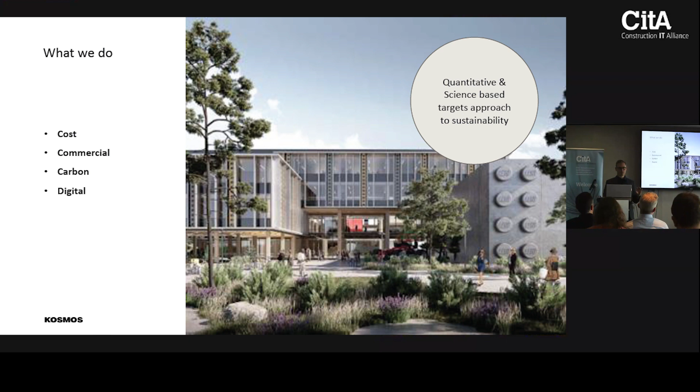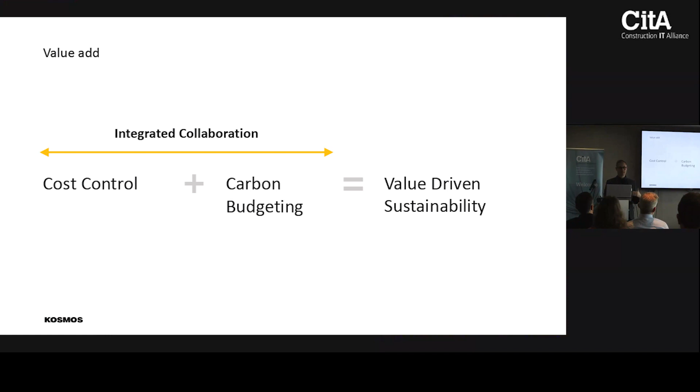And to us, carbon and cost are intrinsically linked. You can't impact one without impacting the other. So to add value to sustainability, we would set a cost budget, set a carbon budget, and use that to achieve those targets through collaboration. So the first thing is looking at carbon literacy, understanding the impact of carbon in buildings. And then how do we actually count that?

How do we put a target on it? How do we set figures for what good looks like and what better looks like? And then what's important is, at the moment, if somebody sets a target for sustainability, it's really dependent on what country they're based in, what standard they're using, and I suppose what the organization's ambitions are.

So we're trying to standardize that and say, no matter what country you're in, no matter what type of building you build, you can set a target for your projects or for your pipeline. And then I think what's important is that we don't do this in a silo. We look at best case examples from London or from Denmark or from the US and see what works there.

So I suppose what's driving all this? What's driving this, the increasing emphasis on not just sustainability, but on decarbonisation? And I suppose at the moment, we have a large kind of deficit in housing that we're trying to meet. And at the same time, we know that construction is quite dirty. It's responsible for about 36% of global emissions, and about 11% of that is just down to the supply chain, to the materials we use.

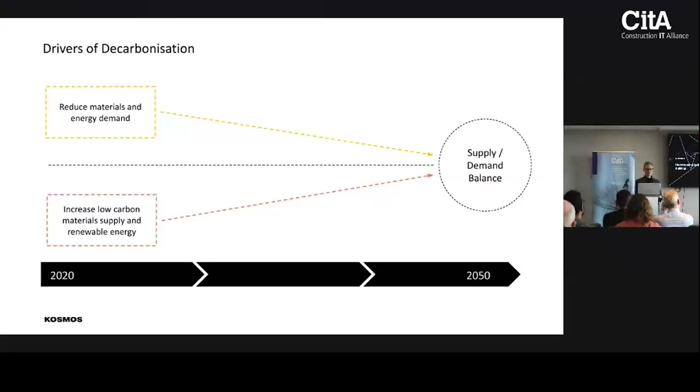So we need to have a more intuitive understanding of the impact of carbon and where the carbon kind of hides out within our construction projects and our retrofit projects. So the way we do this is through whole building life cycle assessment. So that's that life cycle word again, we're taking a whole of life approach to design, procurement, management, maintenance, operations, and disassembly. It becomes the whole life of that project.

And so we carry out an assessment, and that assessment looks at those impacts from the construction process, from the management of the building process that affect the environment, that add carbon to the environment. So we break that down to the individual products and the processes from that. And then we try and measure that against climate impacts like carbon, like methane, like water use.

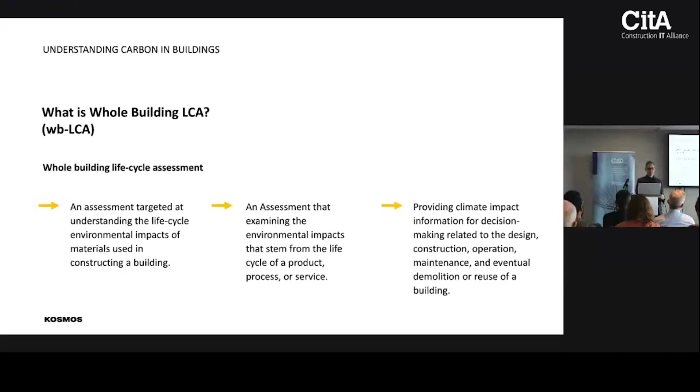So why is it important? Buildings are a big part of our overall global carbon footprint. And we need to know where to target our energies. Should we target it in transport? Should we target it in energy? But buildings, because they're responsible for so much of our climate impact, they're kind of an easy target. So it's easy to set policies to target real estate and construction.

And so we use life cycle assessment calculation to tell us where we are right now with our projects and where we're going, and to set decarbonisation targets that become more stringent every year towards 2040 and 2050.

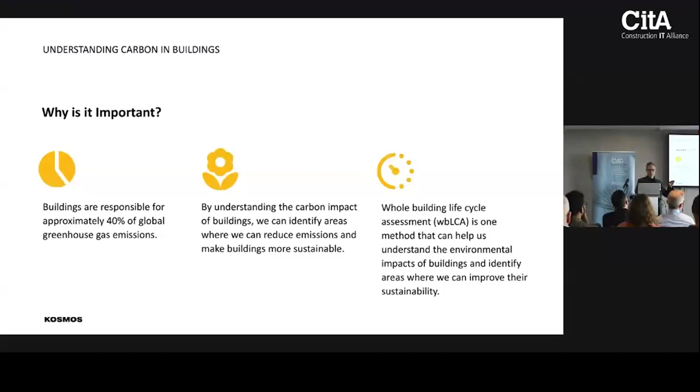So how do we define this life cycle approach to carbon? And what we say is, look, we have some of the carbon that's related to the use of a building, and that's kind of the 50% there that's black. The use of the building being running the chillers and heating hot water, etc., running the fans. But we also have to consider the embodied carbon. So the upfront embodied carbon, which is the carbon that's in the structure and the materials, and then the downstream, which is in the maintenance and replacement.

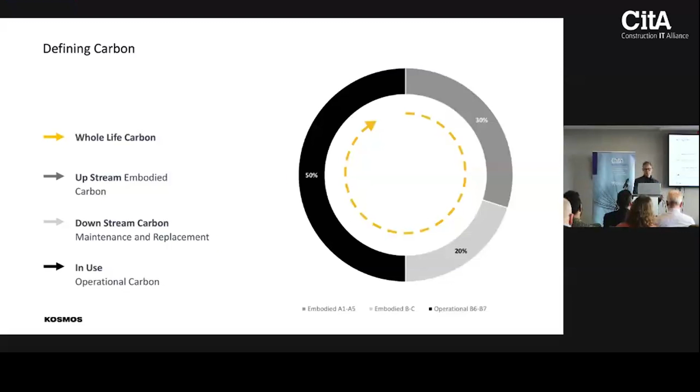And I suppose historically, operational carbon was kind of 70–80% of the equation. But because our buildings are now designed to NZEB, or nearly zero energy buildings, that equation has tilted. And as we go towards zero emissions buildings, the operational energy will become much smaller. As the grid decarbonizes, the carbon in that operational energy will become smaller, and the embodied carbon will become a bigger part of the whole story. So it's becoming a higher and higher priority on the agenda of sustainability.

But it also is an important indicator for a lot of the new disclosure regulations that are coming in. So organizations have started to disclose under the EU taxonomy and under the SFDR for their green funding. But next year, other organizations are going to have to start reporting under the CSRD. And part of the CSRD is you have to plot your pathway against Paris 1.5 degree decarbonization targets.

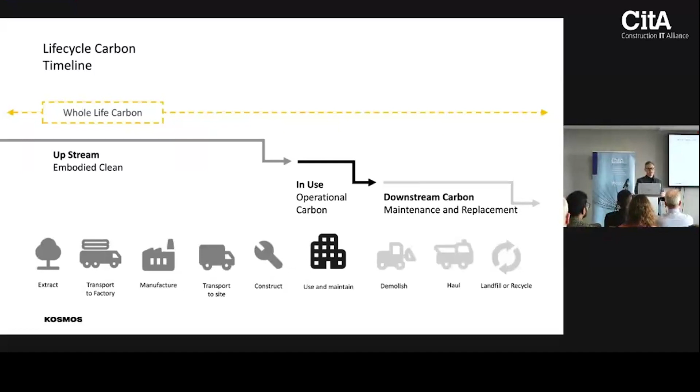So your operational carbon, and if you're an investment company investing in real estate, you have to show your carbon targets, your carbon footprint for each year against those rapidly declining carbon ceilings. So we break down the building into its different components and the different stages of the life cycle, looking right up the supply chain to the raw materials. Where does the steel come from? Is it electric arc furnace from Port Talbot, or is it coal-fired from Turkey? We look at the construction, operations, etc.

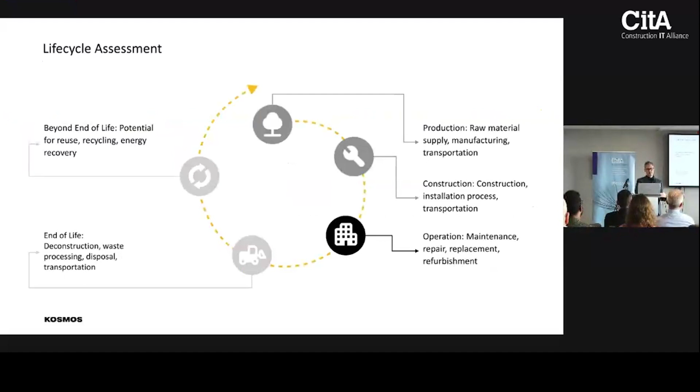So we need a lot of data to understand where the material is being produced. We need its environmental product data sheets, and we need the quantum for that. And we have a number of boxes to fill, and these boxes would be the upstream products, the use of the building and the replacement and refurbishment, the deconstruction of that building at the end of life. And then we can also start to look at, do the materials have a life beyond the building? So that'd be looking at things like mass timber, looking at steel, what happens afterwards with that.

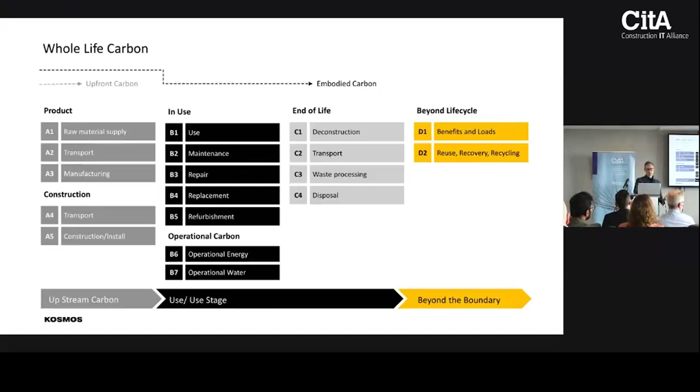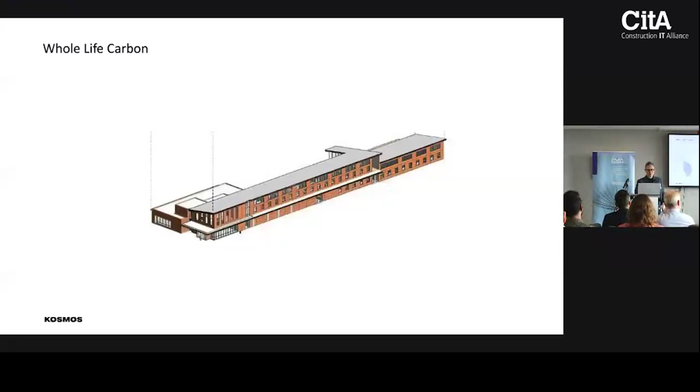But like anything with data, there's challenges within that. So when we look at a building, say a school, predominantly the structure and the walls of that are going to take up a large volume. The facade, like the brick cladding, is another part of the volume. And I think it was Buckminster Fuller who said, "How heavy is your building, Mr. Foster?" And generally we can equate heavy materials with carbon intensive materials. So we can see that the majority of the carbon impact in this building is in the heavy components of structure, cladding, roofing. And so we can focus on those.

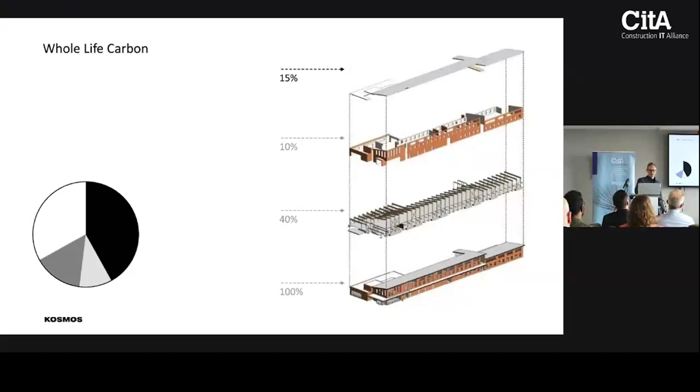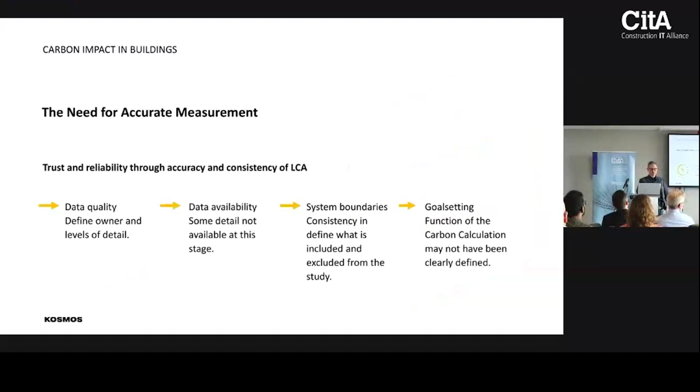The Pareto rule is that 80% of the work is in 20% of the materials for us. That's not exactly Pareto, but yeah. So accuracy is important in carbon because it's a bit of a wild west at the moment. Two assessors could do a carbon assessment and come up with completely different results because they're defining it separately. They're using different boundaries, different methodologies. So consistency and accuracy is the order of the day at the moment.

So we're trying to make sure that everyone is using the same calculation, and the Irish Green Building Council are working at that, but also consistency, that if we measure one building against another, they can be compared. And in terms of standardization then, in that data, we've been through this process with BIM before, but BIM is quite useful to streamline the process of taking off quantities. So for instance, if you're taking off quantities for cost, it's the same volumetrics that you're going to use for carbon. So instead of measuring twice, you just need to measure once.

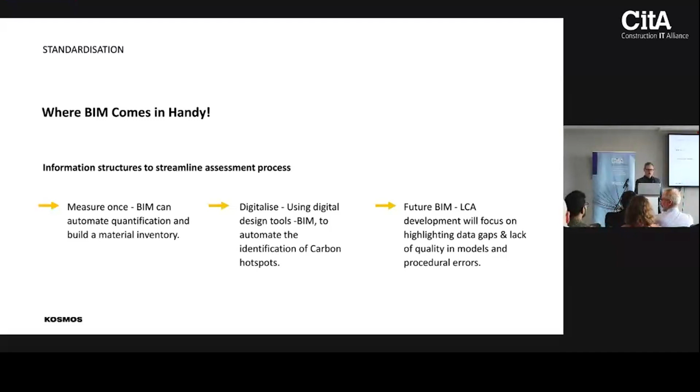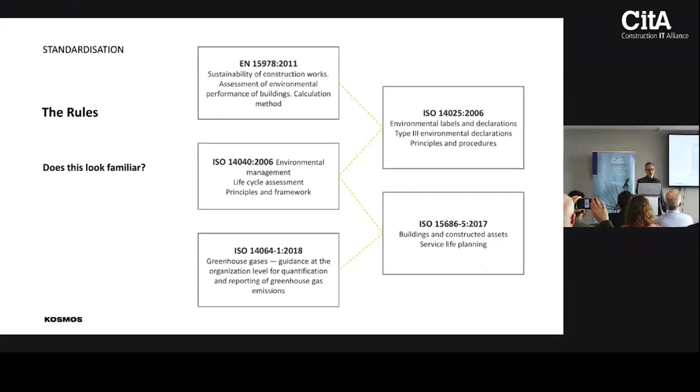In terms of identifying hotspots, having a model where you can segregate it by materials is quite useful. And BIM will have more of an impact. I'm looking forward to seeing Simon's presentation on this later. So in terms of standards, there's a number of standards for LCA. So in a way, it's similar to the journey we had with BIM. And using the BIM models, we can start to take off more accurate quantities, but we can also track the building. So if something changes, then the volumes change, the budget changes, the carbon changes. So we can track it at each gateway.

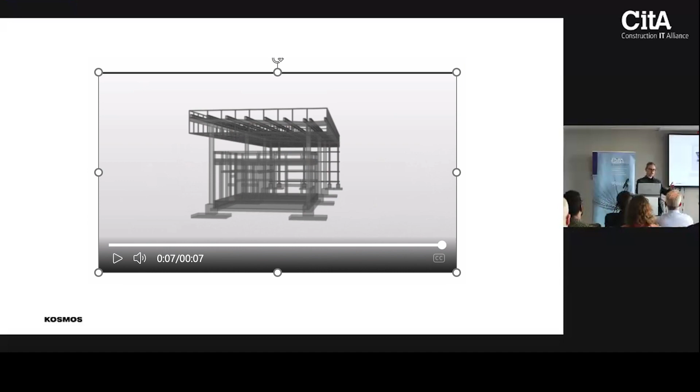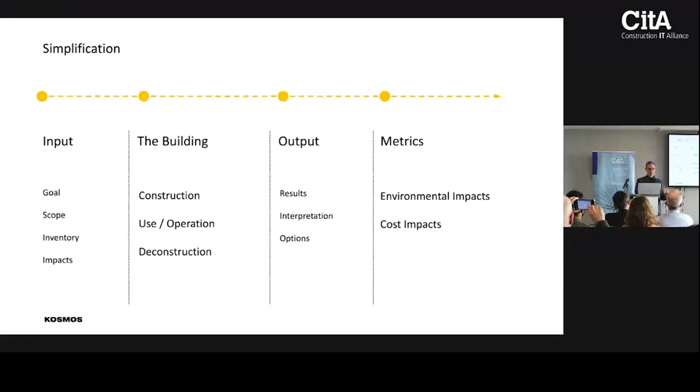But what we've learned from international practice, over 8 years in Denmark, is that you need to have a standardized process that everyone in the design team, everyone on the client team can fit in with. The outputs are only as good as the inputs. But what's important to us is that the metrics that we have are the climate impacts, the cost impacts, but also the data quality scoring is important. So in Denmark, they have an 8-year head start.

We're trying to do this in 3 or 4 years. In Denmark, they've done this in 8 years. But looking at Denmark, it will help us short circuit that. So they wrote life cycle assessment into their building regulations as a voluntary guideline back in 2014, and they built an assessment tool, and then they published it in the regulations and started to test out what good might look like and look for data.

And they looked for 80 buildings first of all, and they then looked at 200 buildings to say, what should the mandatory standards be? And in January this year, the mandatory standards came in. And now the designers are coming back saying they're not ambitious enough. They really don't meet our national targets.

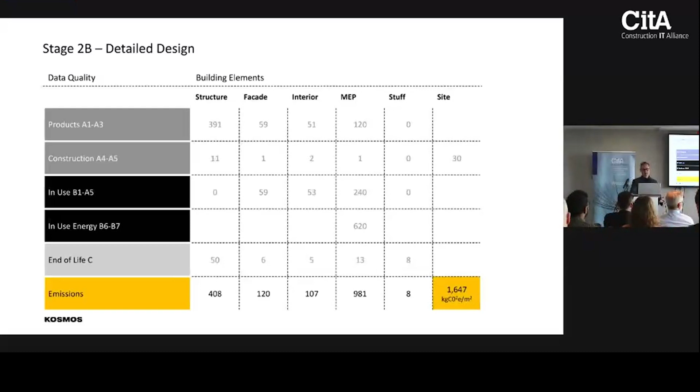So essentially, what we focus on is data quality to be able to say, well, how representative is your carbon model of the construction stage building? And we would say, well, in terms of structure, your structure is fairly comprehensive, fairly representative. But as you score the data going down towards interior finishes, MEP, external landscape, external civils, you have lower figures. And so your representativity score can be quite low. So to go for tender without having the full picture can be a risk.

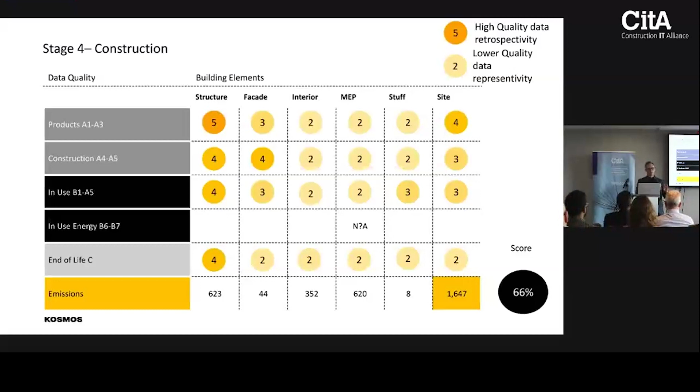And what we would do then is, just like in cost, we would add a contingency and say, you need to add a contingency there, because if you are writing performance criteria into your contract, then you want to make sure that the main contractor can actually achieve those targets. So I suppose where we come in on public projects especially is to look at where the data gaps are, where there is uncertainty, and try and either plug those or make sure that there's sufficient budget in place for that. And so there's a kind of a process to do that.

And we would say, look, at a very early stage, do some baselining, and then work with the organization or the funders for your goal setting and your data collection strategy. And then start to look at, well, what changes if I apply a life cycle lens? Do I look at materials that have longer service life? Do I look at air conditioning units that use a different type of HCFC gas? And how do I make sure that I have a maintenance strategy? Do I asset tag with GS1 and SFG20 systems, etc.?

How does carbon overlap with the sustainability objectives of BREEAM and LEED and DGNB and Levels and all those other good things? And then let's plot this out and look at our net zero roadmap. So we know that the carbon ceiling is reducing all the time as we get towards 2050. Can our building track that? So have we a building that's, say, fully electrified? It can piggyback off the grid. As systems come up for replacement or renewal, they can become more efficient.

And the tenants that operate the building can also have a relationship with the landlord that facilitates achieving zero carbon ambitions. Data quality I've spoken about, and that's really where the BIM part of it comes in, that you need to be able to evaluate that. And then optimization. There's an exercise where you look at optioneering, and that's where the BIM model is quite handy, that you can test out scenarios. That's where using scripts is important as well, that you can test out a range of different scenarios.